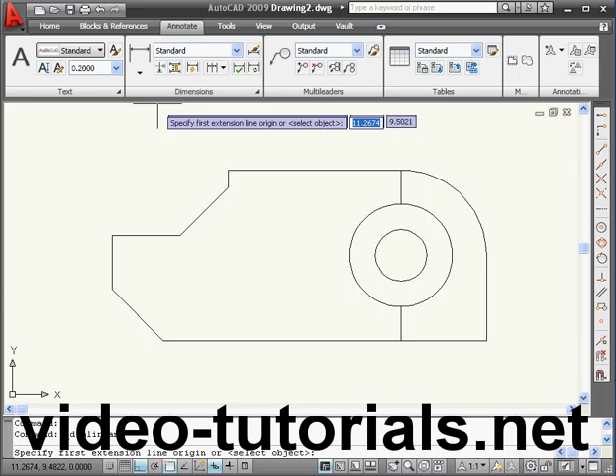Here we've got a number of dimensions to choose from. Let's start with linear. Let's toggle ortho mode on. Right-click on snap mode and deselect quadrant. Right-click and deselect the midpoint also.

Let's select this point, and click somewhere here. And here is our first dimension. This type of dimension is called a linear dimension. Let's select it again. Select this point, and here is our second dimension.

Let's select linear dimension again. We'll select this point, and click somewhere outside. When I move the mouse up, I see the horizontal dimension. When I move the mouse sideways, I see the vertical dimension. Let's click somewhere here. Let's put another dimension here, using the same points,

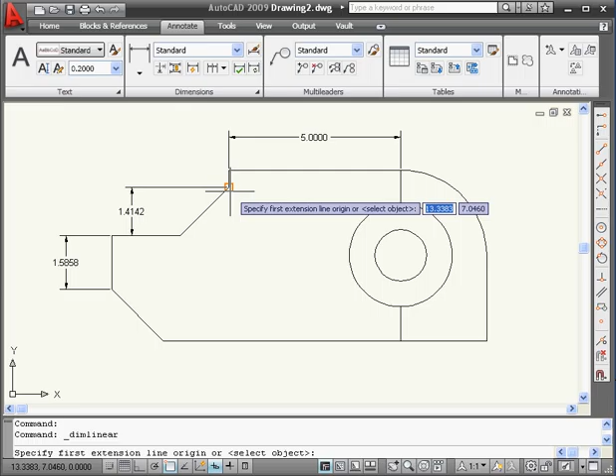And click here. As you probably noticed, our dimensions were supposed to be red, but I see them in black. That's because I created them on the wrong layer.

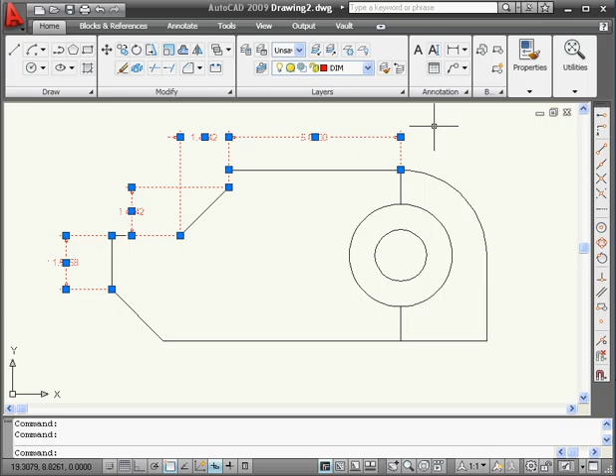Let's select the dimension layer from the layer drop-down menu. Let's right-click and deselect everything. And let's go back to the dimension layer. Back to the Annotate tab now.

The next dimension we're going to look at here is the Aligned dimension. Let's specify our first point, this point, and drag our cursor down. There's our dimension. Since it looks just like a linear dimension, you might be wondering what the difference is. It looks just like a linear dimension because the line I dimensioned is a horizontal line.

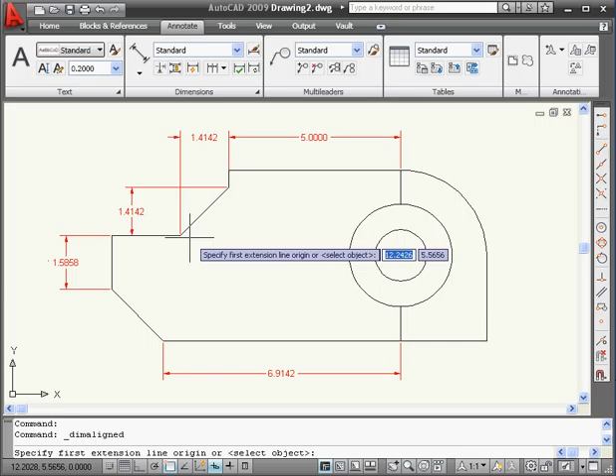Let's try a couple different points. Place my dimension somewhere here. Another way to describe the difference between these two dimension types, linear and aligned: the linear dimension gives you the horizontal and vertical distance between 2 points. The aligned dimension, on the other hand, gives you the real or true distance between 2 points, the as-the-crow-flies version, so to speak.

Okay, let's take a look at our next dimension type, the angular dimension. To create an angular dimension, we select a first line, and then a second line, and here is the angle between them. Let's place another angular dimension here.

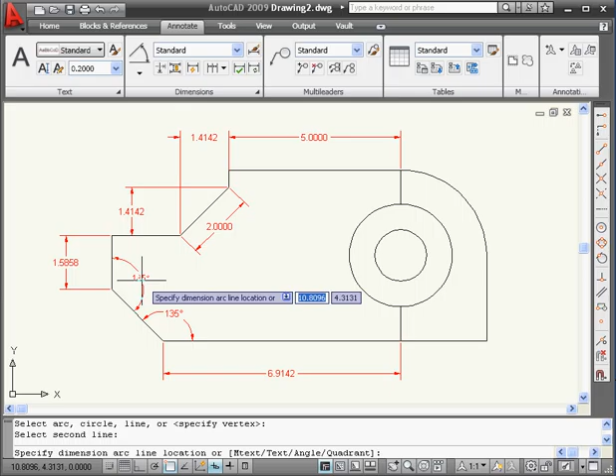Select this line, and this line. I can place this angular dimension here, here, over here, or down here. Let's drop it right here.

Let's create another angular dimension now. This time select this arc. In this case, we only need the one arc, of course. Let's drag the dimension out right about here.

Let's say I want to place an angular dimension between these 2 points along this circle. Let's activate the Dimension tool first. Now activate the Snap to Intersection tool. Select the circles and place the point right about here. Now I need to place a second point. I'll select the end point of this line and place the angular dimension right here.

When you place a dimension in a situation like this, you need to be sure that you're selecting the circle but not the line. Let me take a minute to demonstrate what I mean. I'm going to select the intersection instead of selecting the circle. I get this line. Now see what happens? I don't have the rubber band effect from the center of the circle like I had in my previous example.

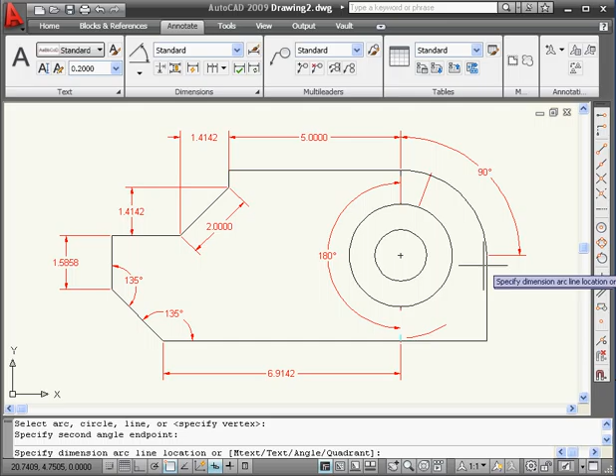I need to do the second step, select the circle, and then step 3, select the line. And see what's happened here? I've selected the circle in the wrong place. Okay, let's undo this.

The next dimension we'll use here is arc length. I'll select this arc and place the dimension right out here. This is basically a linear dimension along the arc.

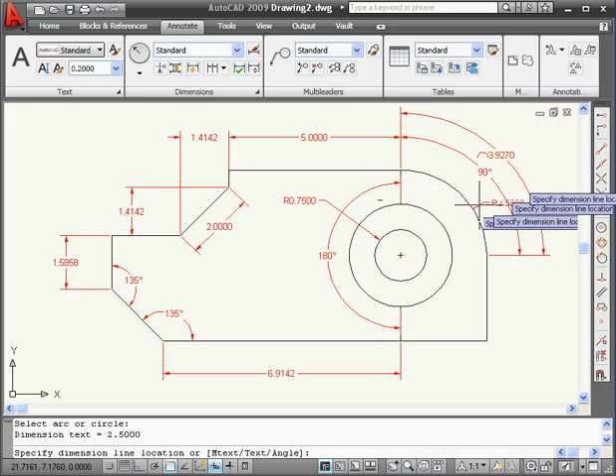The next dimension we're going to look at is radius dimension. Let's select this circle, we'll place the dimension somewhere here. Activate the radius dimension again, select this arc, and place the dimension right about here.

Now let's take a look at dimensioning diameters. Let's select this circle and place the dimension out here. As you probably noticed, I've got a duplicate dimension here. AutoCAD didn't warn me about this, as most CAD software does, so keep that in mind.

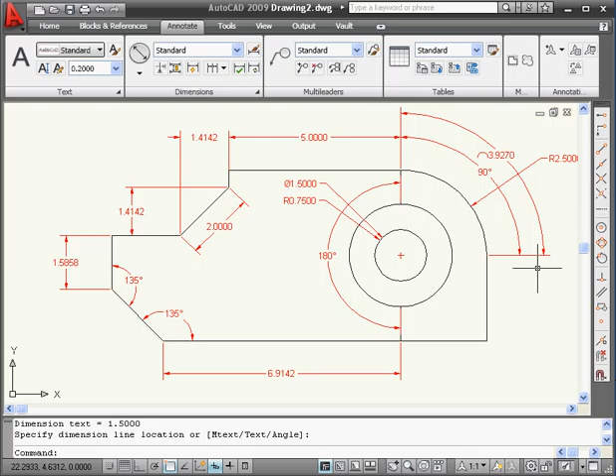Now we're going to take a look at continue and baseline dimensions. Let's move on to my next example, and I'm going to zoom in a little. In order to use baseline and continue dimensions, I need to create a linear dimension first.

Let's create the dimension between these 2 points and place it right here. And between these 2 points, 1, 2, and let's place it out here. Actually, let's undo that. We're going to create a different dimension between this point and this point. Let's place it right about here.

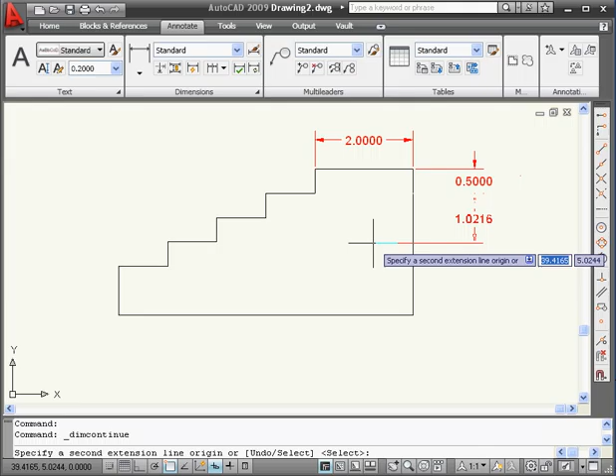Okay, here we have the continue and baseline dimension options. Let's look at continue first. Notice AutoCAD picks up from the point where I last dimensioned. Let's select this point, this point, this point, and this point.

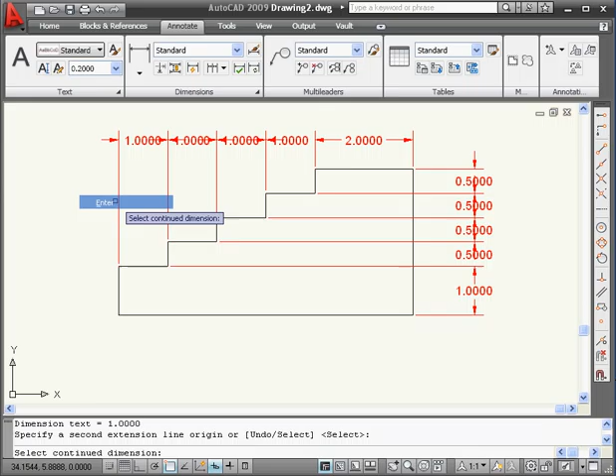After I'm done, let's right-click and enter. You might have noticed that the command is still active. AutoCAD asks me to select the continue dimension. Let's select this one, this point, this point, this point, and this point. Right-click and enter. Let's click Escape to exit the command. Now let's delete these dimensions with a window selection.

Let's take a look at the baseline dimension option now. Once again, we'll start by creating a linear dimension. Let's drop it up here. Now select baseline. Once again, AutoCAD picks up from my last dimension. We're going to select a few more points.

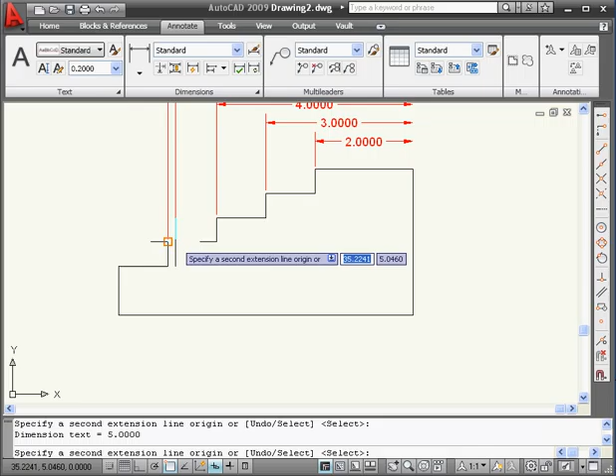Right-click, enter. Now press Escape to exit the command. And here is our baseline dimension. This concludes our tutorial about using dimensions.